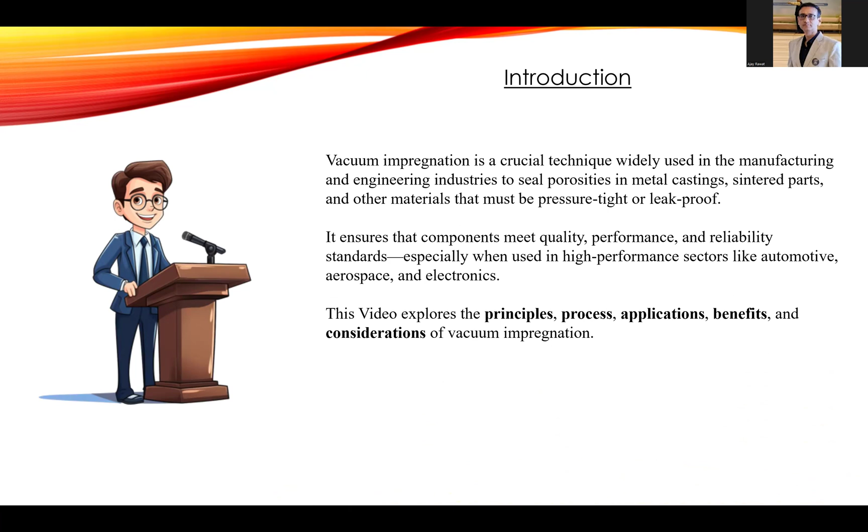So what is vacuum impregnation? Basically, it's a method used to seal microscopic voids or porosity found in metal and non-metal components. These tiny voids are usually the result of casting, sintering, or molding. If left untreated, they can lead to leaks, corrosion, or even mechanical failure.

The process involves removing air from the pores using vacuum, filling them with a special sealant, and then curing it without altering the shape or properties of the component.

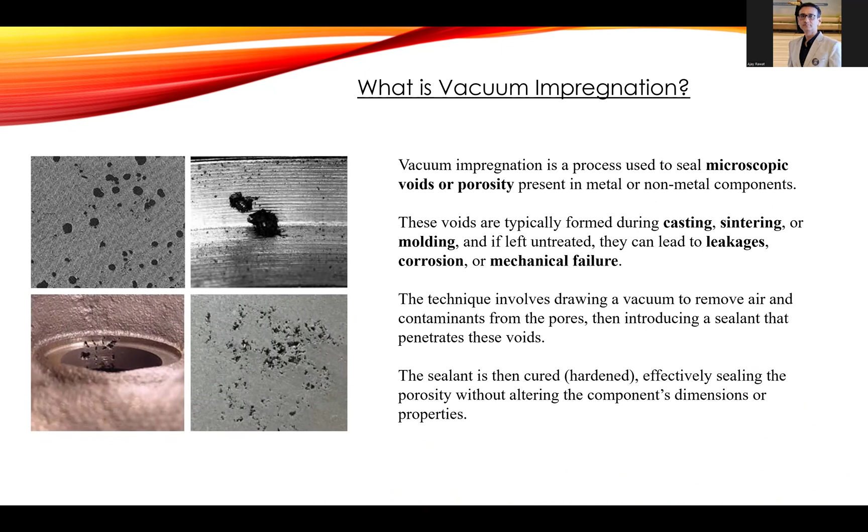Vacuum impregnation plant: the process is carried out in a vacuum impregnation plant, also known as VPI chamber. These plants improve material performance by injecting a liquid resin or sealant into the voids under vacuum pressure.

So why is porosity a problem? Even if it is not visible, porosity can cause leaks of fluids or gases, reduce mechanical strength, poor surface finishes, machining issues, corrosion starting points, and in electronics, reduced dielectric performance.

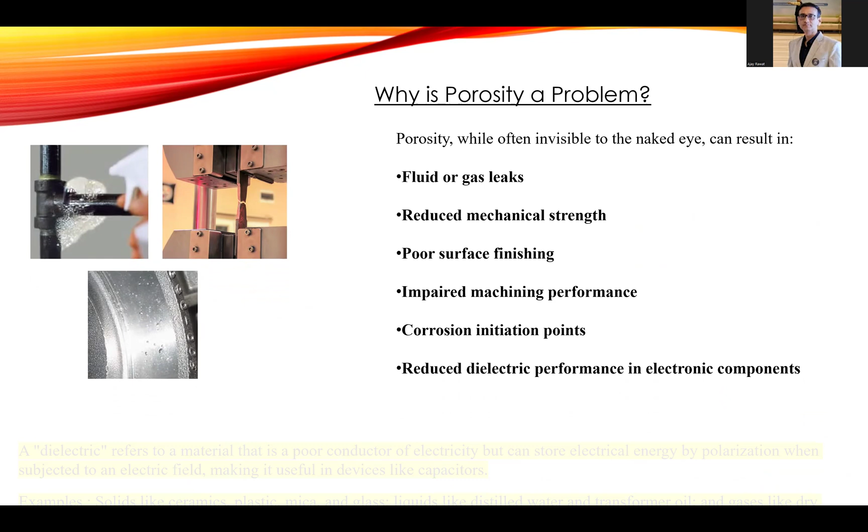You must know here what is dielectric. Actually, they are materials that store electrical energy rather than conduct it. Examples include ceramics, plastics, mica, glasses, distilled water, transformer oil, and even gases like nitrogen and helium.

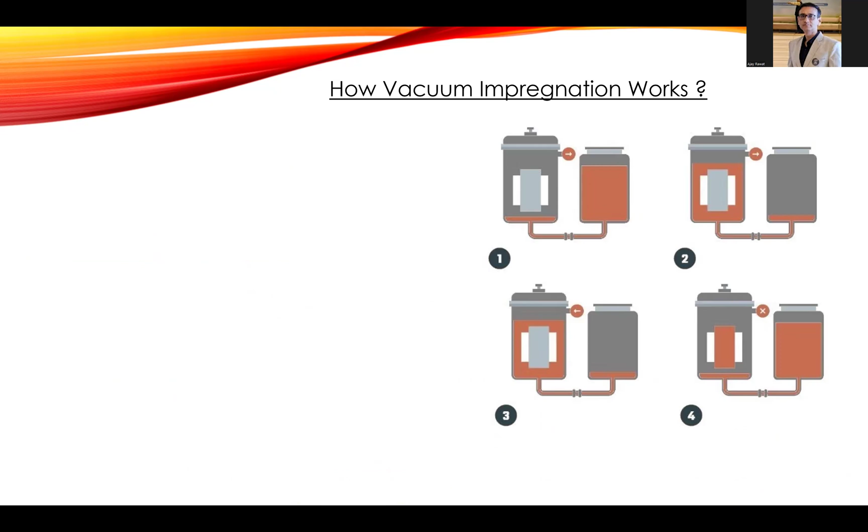So how does vacuum impregnation work? Let's break down the process. Number one, pre-cleaning: first, the part is thoroughly cleaned to remove oil, dirt, or machining residue. Number two, vacuum stage: next, vacuum is applied to evacuate air from the component's voids.

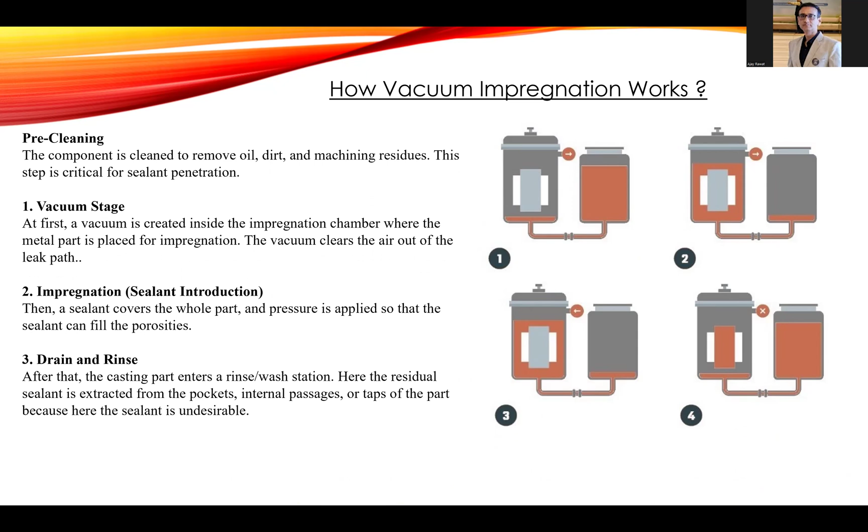Number three, impregnation: a liquid sealant is introduced, filling all the porous spaces. Number four, drain and rinse: the part is rinsed to remove any excess sealant from unwanted areas. Finally, the sealant inside the voids is hardened either using heat, UV light, or other curing methods.

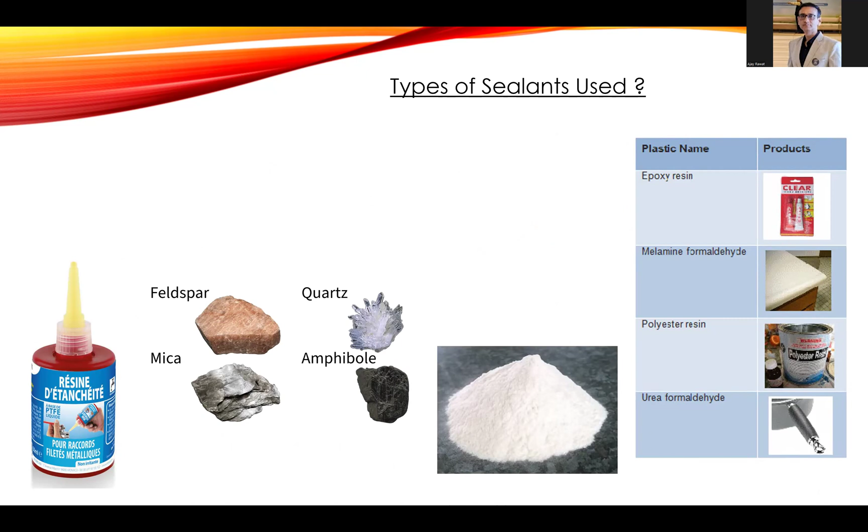Types of sealants used: various types of sealants are used depending on the application, such as thermosetting resins like epoxy and polyester, which are heat or UV cured. Anaerobic resins cure in the absence of air, great for tight voids.

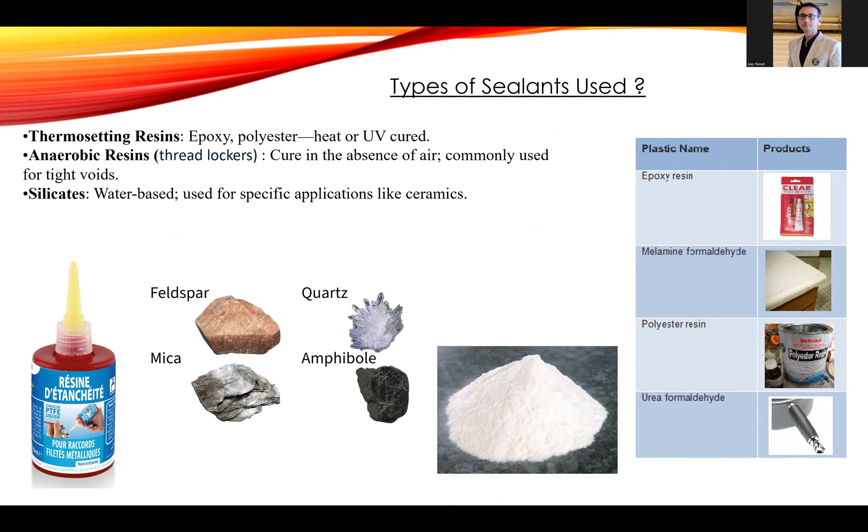Silicates are water-based sealants used in ceramic components. Acrylic resins are popular in automotive and aerospace for their chemical resistance.

Application of vacuum impregnation: where is this technique applied? In automotive, the process is used in engine blocks, gearboxes, and almost all types of aluminum parts because they are prone to leakage due to pinholes and blowholes.

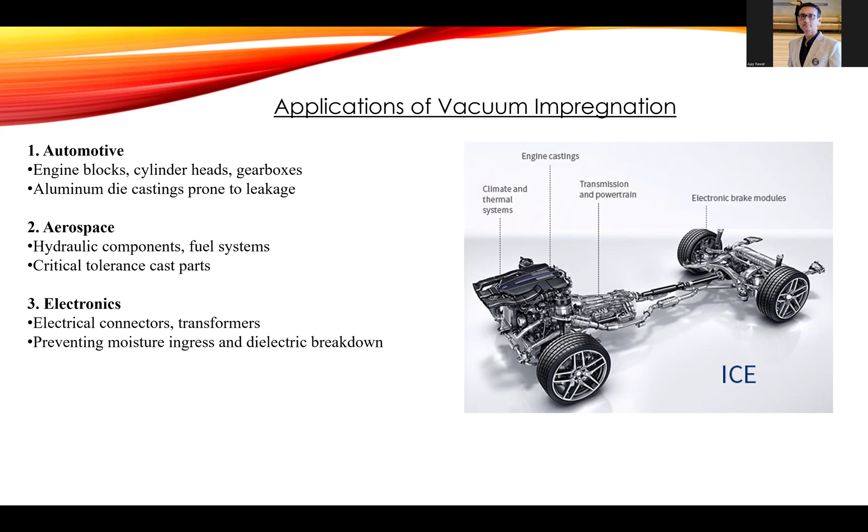In aerospace, this process is used in hydraulic components and fuel systems. In electronics, this process is used in electrical connectors and transformers. For sintered parts, this process is used in bearings and filters. In 3D printing, this process is used to seal internal porosity in metal printed parts.

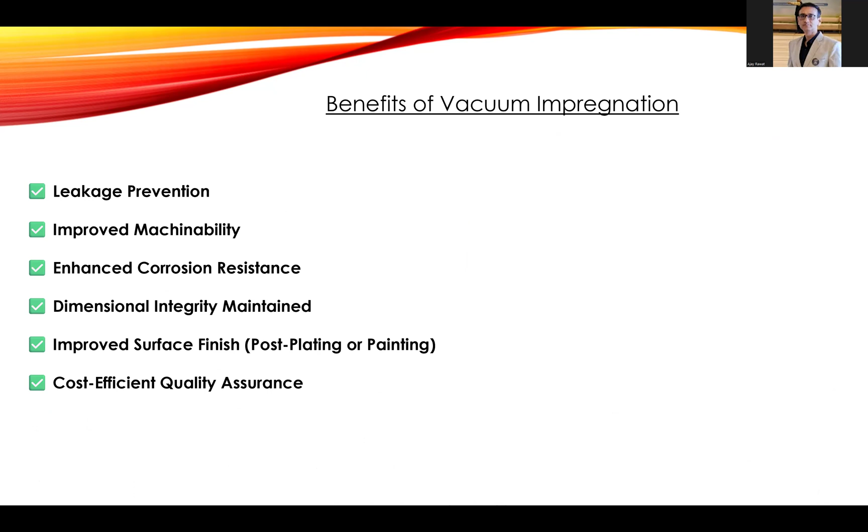Benefits of vacuum impregnation: this process offers several advantages - prevents leaks, improves machinability, enhances corrosion resistance, maintains dimensional integrity, gives a better finish for plating and painting, and overall, it's a cost-efficient quality control method.

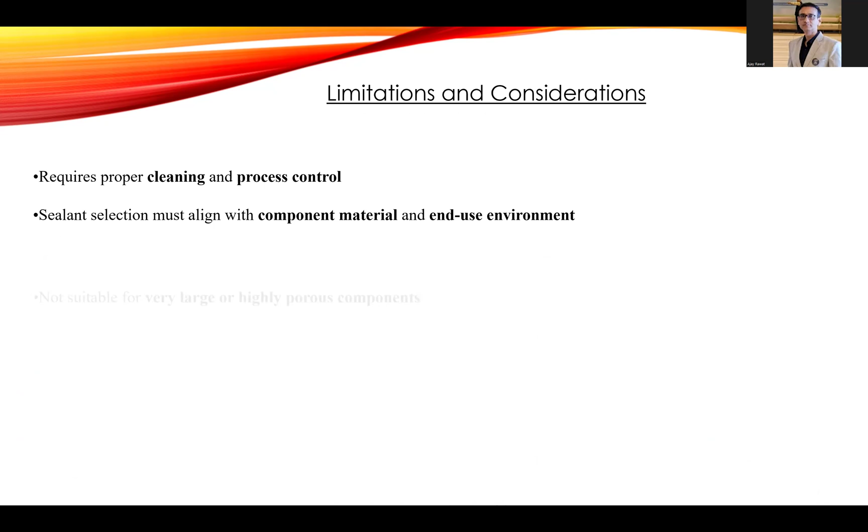Limitations and considerations: but like any process, it has its own limitations. Number one, the part must be properly cleaned. Number two, the sealant must be suitable for the material and application. Number three, not ideal for extremely large porous parts. Number four, curing must be precisely controlled to avoid damage.

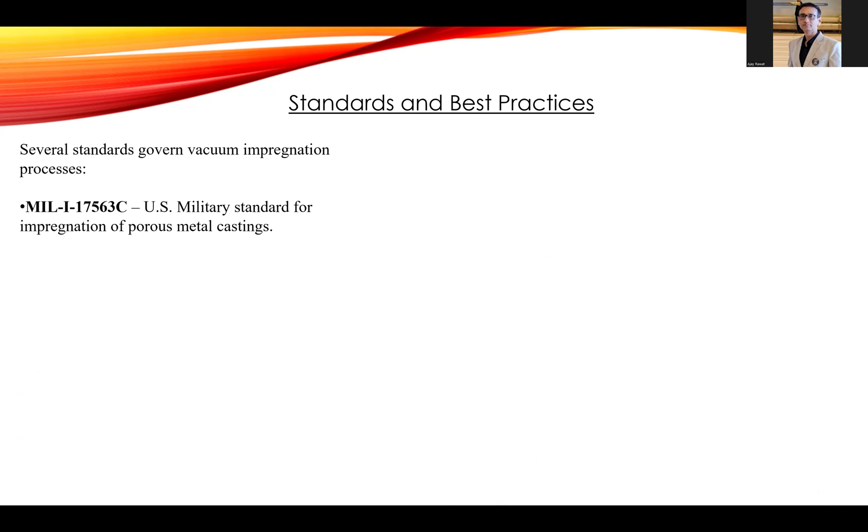Standards and best practices: several industry standards govern this process, such as MIL-I-17563C, a US military standard which governs this process. ISO 16378, an aerospace grade standard, also governs this process, and ASTM B783 gives the guidelines for sealant performance.

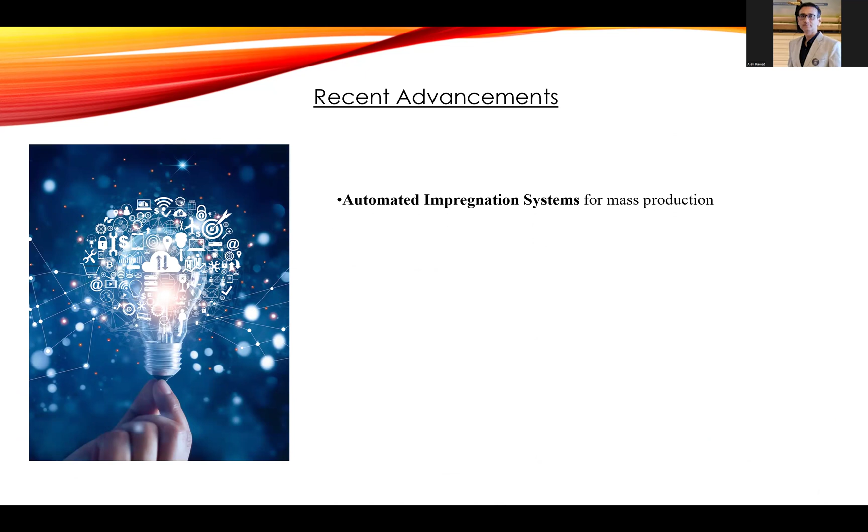Recent advancements: some recent innovations include automated systems being used for high volume production. Eco-friendly sealants have been introduced in the market, with low VOC emissions. Industry 4.0 integration has been done for this process. Many industries are using hybrid vacuum pressure systems for better penetration.

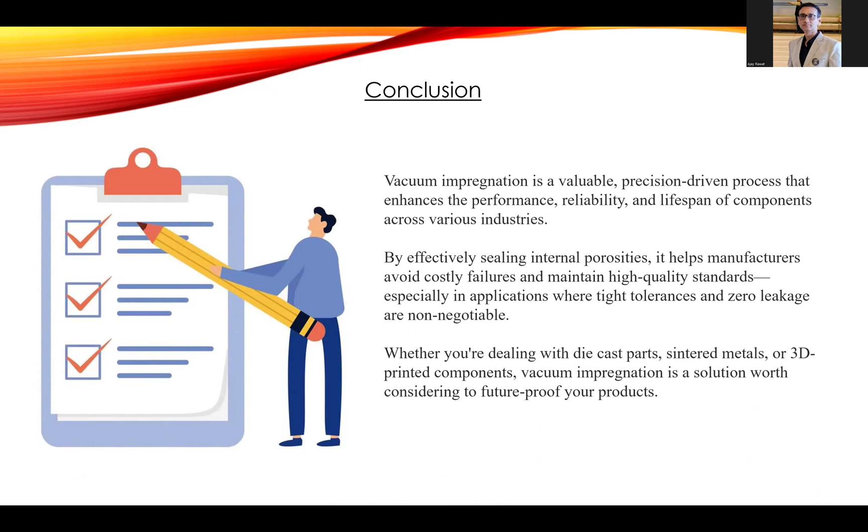Conclusion: to wrap it up, vacuum impregnation is a precise, reliable technique that significantly improves the durability and quality of components. From automobiles to aerospace, from sintered metals to 3D printed parts, this process helps industries prevent failure, reduce rework, and deliver superior products.